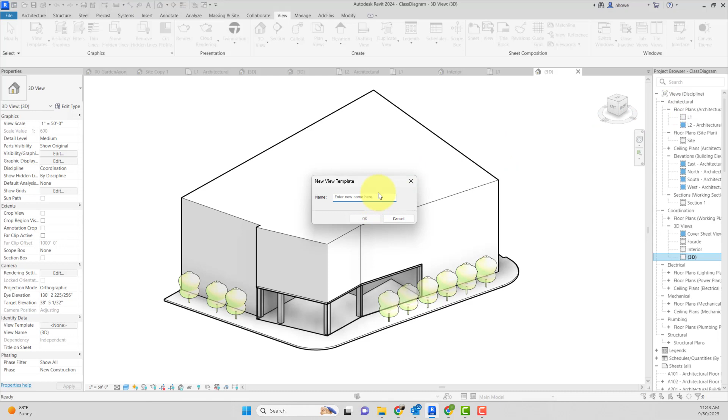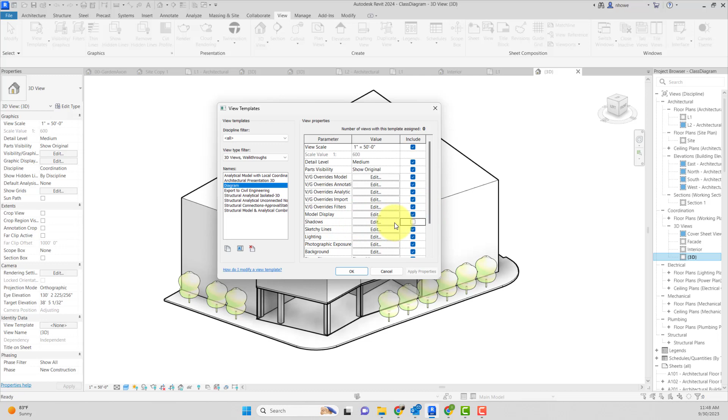Now what that does is it creates a series of parameters that you're including. All of them will be included. Those that you don't, like say if you want to have shadows on or off depending on the view, you could click that and then turn shadows on and off as you normally would down here. If you have this clicked, all of this is going to turn gray once you've applied that view template over here.

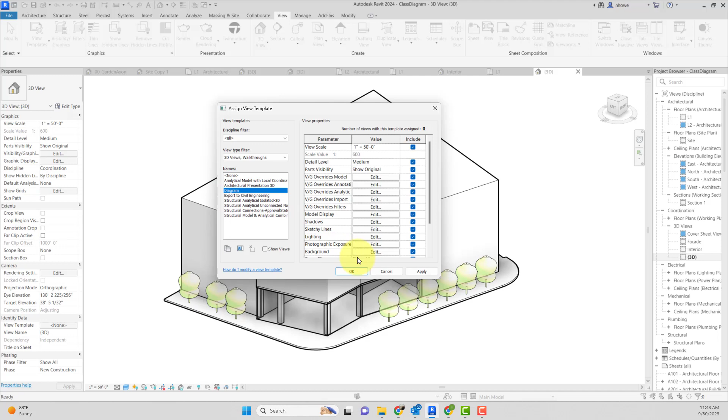So let's just take a look at that. So if I go over here now and I use diagram, I'm going to apply it. And then things that I still have control over are going to still be here, but the things that I don't, such as shadows on or off, are suddenly gray. When I go into here, you can see everything's gray because I haven't allowed anything to be touched.

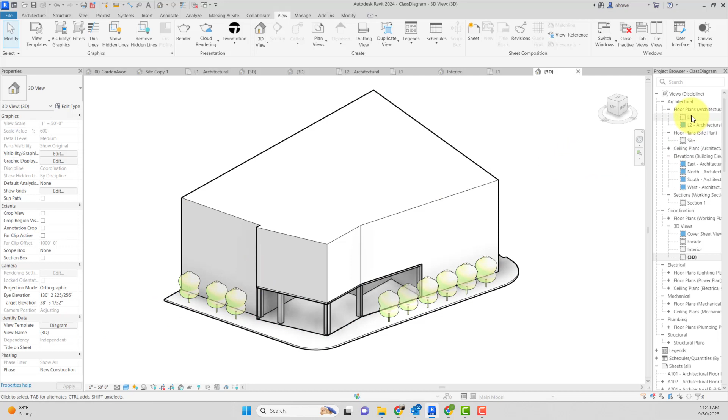So the power of that is that I can go now into level 1 and I can say, hey, let's use that diagram. I can't see it, but I think if I do all here, I should be able to see it. Say diagram, and everything's going to show up.

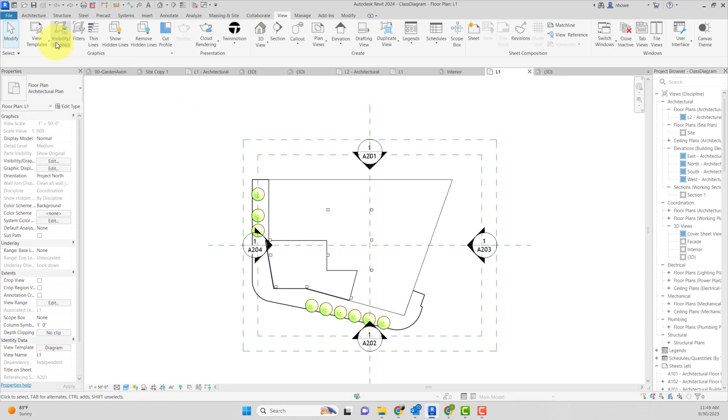And it could be, I could also decide that in this view template, under here, manage view templates, that I can decide, well, you know what, I'm probably not going to want any of those types of callouts to be visible.

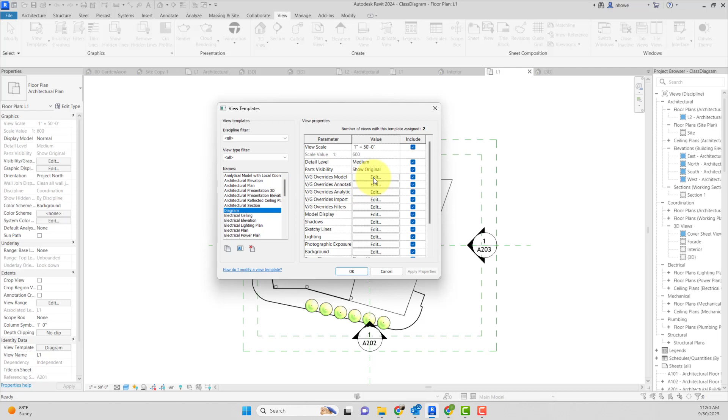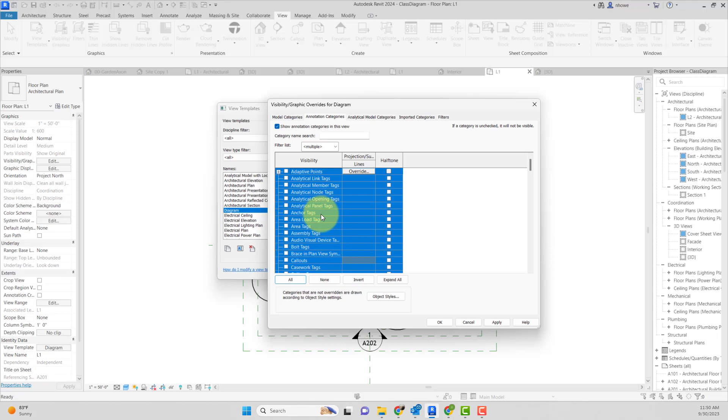So if I go diagram and I go to annotation, I can say, okay, for my diagrams, I really don't want to see any of this. No annotations, no elevation marks, no level marks, no diagrams. That may or may not be the case, but that's what I'm doing right now. So I'm turning them all off.

And so now that changes kind of how this shows up. Pretty simple. And you can apply this to anything that you're wanting to kind of show off.

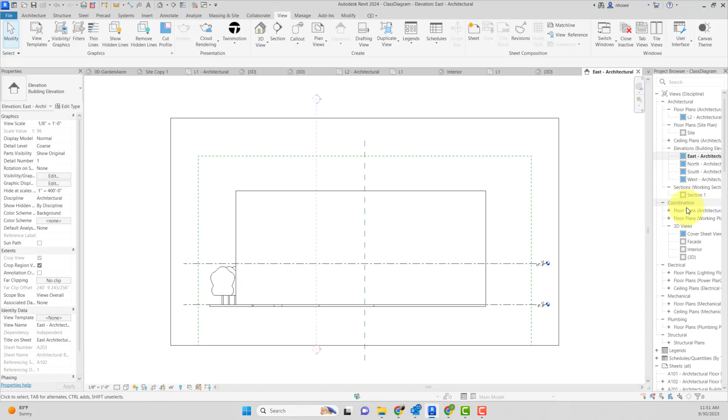So let's see, like this, I should just go in, click diagram. Now it is always showing when it's a 3D view because I made it from a 3D view. So that's why I didn't have to hit all. But like plans and elevation sections, I'm going to have to do this all to get to it.

Now I can always come back and say none if it gets to be a hassle and I just want to change a few things and take a look at it. I can always do that. But every time I go back to diagram, it will take on that same whatever the parameter.

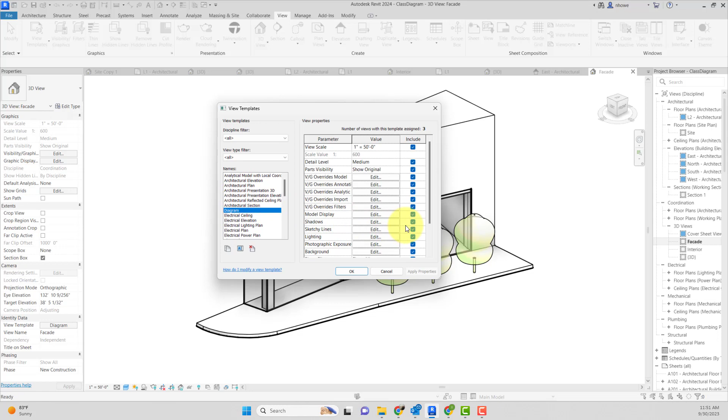And again, if I want to then say, hey, you know, having shadows on, or at least being able to click them on or off, I just go up to here and I say, okay, for now on diagram, I want that to not be included so that I have control over that. So now it's lit up.

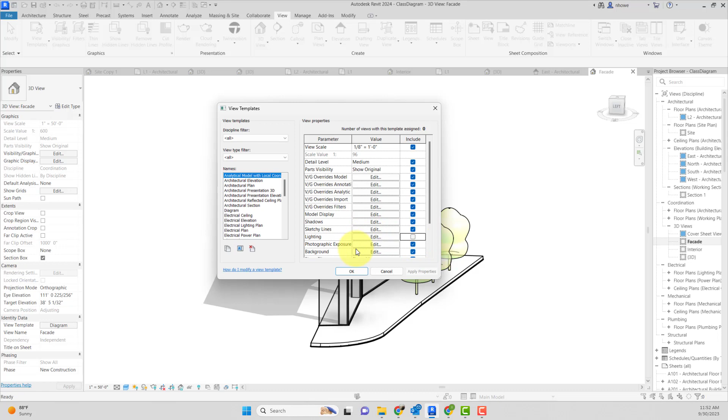And if I need to show shadows, the other thing I would probably want to click is to manage lighting so I can control where the light's coming from. I can edit that. So that would be the other thing I might click. All right, so that's view templates.

What I might do, I would have a diagram template. I think we'll probably eventually get into having some presentation view templates versus kind of working view templates. You'll see in here there are a lot that are kind of already preset.

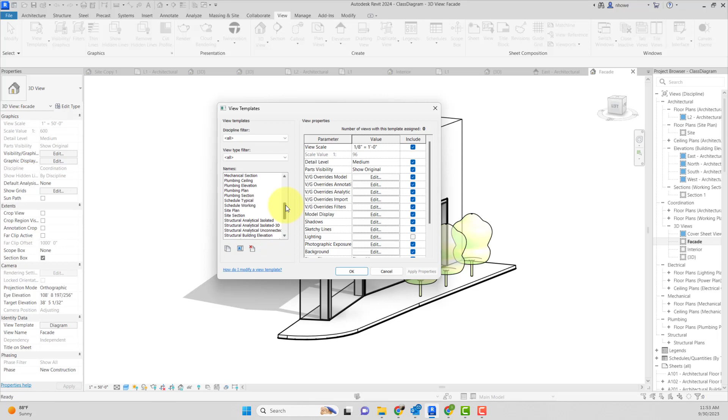So working plans versus maybe architectural plans or presentation mode. You can really kind of set up some very specific view templates so that you can kind of be flipping as you're working down to some template, and then when you go into presentation mode, you just flip them back to presentation mode. All right.